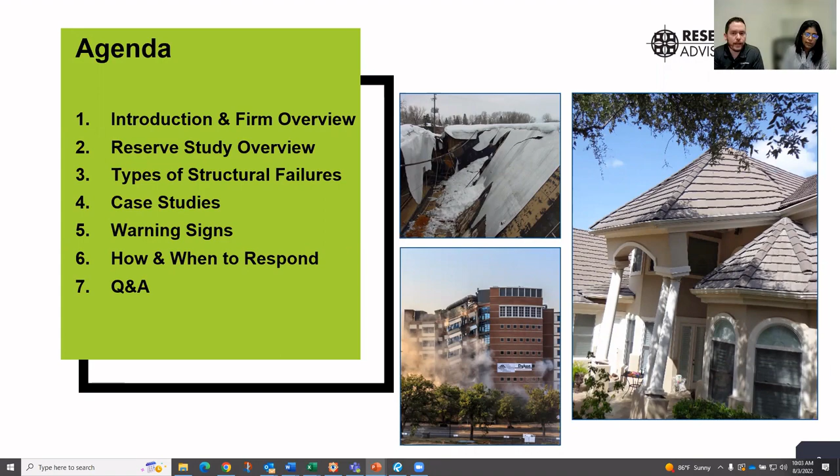So as an introduction to myself, again, Kyle Hunter of Lerch Bates. I started my career in the architecture, engineering, construction industry back in 2013, primarily working in human resources and various functions, but was very interested in the AEC industry, continued working in that industry for quite some time before moving into the building enclosure consulting side of things, working with different consultants.

I've been with Lerch Bates, formerly Pie Consulting and Engineering. Some of you may be familiar with that name. We were acquired back in 2020, about the time that I started on with the company. Operated under the Pie name for about a year before going ahead and adopting the full branding and new logo and everything of our parent company, Lerch Bates.

My role here at Lerch Bates is business development function. So working with our existing clients, maintaining existing client relationships, developing new client relationships, and helping clients to identify issues that they have, and aligning on scope of services for what we do, and budgets, so scope and fee alignment. And then when the time is right, making the appropriate introduction and handoff to one of our technical experts, such as Amita Hamadi, who we've got here today.

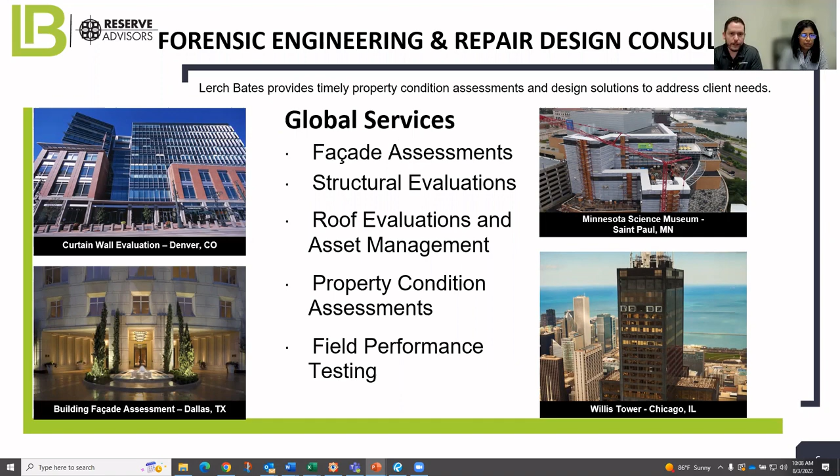And regarding Reserve Advisors, it's actually a lot simpler because we do one thing pretty much, and one thing only, and that's reserve studies. And so similar to Lerch Bates, we have a national presence, which is great because it helps us understand local markets and have engineers located in your backyard, hopefully, or darn close to it. But since we just focus on reserve studies, that's why we thought today bringing in Lerch Bates to talk about bridging that gap, sort of what maybe comes next if you've already gotten a reserve study.

And so with that, on the next slide, I'm going to be a little bit briefer today. I can be long-winded at times, so I'm going to try to save as much time for Amita here. And I'm just going to pseudo-quickly cover reserve studies and just a couple facets about those, which then should lend itself to what Amita will talk about.

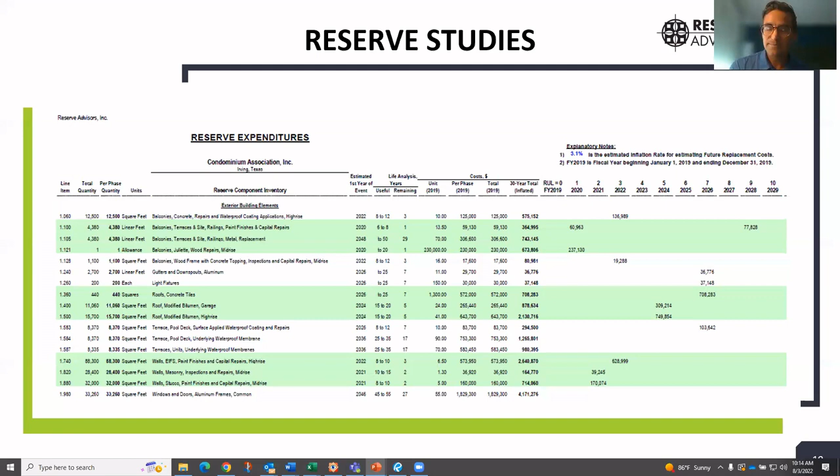And then on the next slide, I just put in some pictures from a reserve study. So this is just an excerpt from the document. And it's a coincidental one because there's going to be some photos later of this same building once these outer layers were taken off. And what I mean by that is this was a visual non-invasive inspection of a property that identified some evidence of possible water infiltration. But again, in that reserve study, we're not peeling anything back. We're making all of our recommendations on what we can visibly see.

So in this case, we certainly said you need to do some near-term work to the wood trim elements. You need to do some work to the facades. But as some pictures later on from the Lerch Bates team will show, once further investigation occurred and was warranted, a whole host of new issues were discovered.

And so that's sort of where I want to bridge that gap: a reserve study, not from us, not from any company, is ever going to be able to identify these hidden underlying defects, latent defects, or just deterioration that is beyond the surface. And that type of deterioration can be wildly damaging, which Amita has a lot more history and experience to speak at length to.

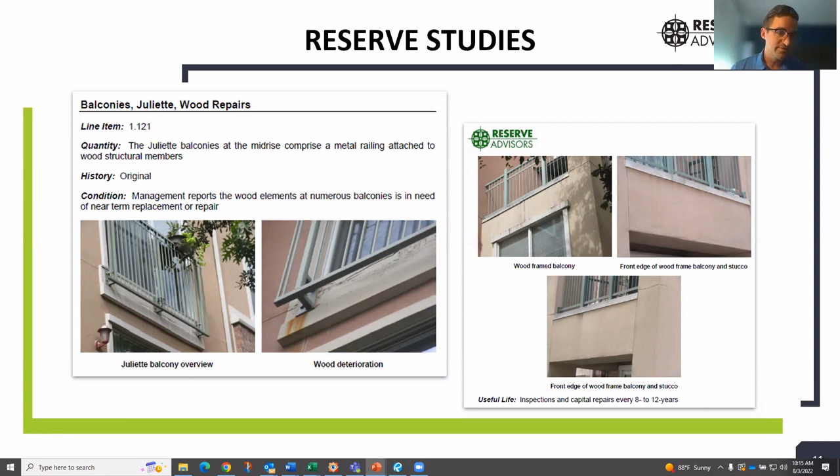And so that's where you want to view this reserve study as that first step, that budgetary step, right? That 30,000 foot view that's sending you in the right direction. But when you have a reserve study, if it's identifying some potentially concerning things, that's where you now need to shift over and look into engineering services, right? And so that's where I'll pass it over. Oh, I think I have one more slide. I'm so sorry. But that's what Amita is going to talk at length about this morning, that next phase of engineering services and what exactly that is, what they're looking for, and things of that nature.

A final point that I just wanted to mention here, we sort of presumed we could get some questions on this. So more and more legislation is getting passed. The most significant one would be in Florida, SB 4D. Very high level in a nutshell, this has required what's called a structural integrity reserve study. It's something we have some resources on. If there are some Q&As, we can try to dabble on it, but we're not going to want to talk for an hour just on that. But that's a pretty big change from a legislation standpoint that's affecting the reserve study and engineering services industry.

And you see some additional legislation in Illinois. Maryland just passed another pretty strong one about reserve studies being required every 5 years. Virginia already had some statutory language, and they've just established a new task force. The reason I want to point this out is we are seeing a rather quick acceleration of legislation around this concept. All of this is revolving around trying to make sure boards and associations are maintaining their properties, because what we're finding is these are huge assets. When damage runs out of control and it's hidden, and then we try to rectify it, the cost can be sometimes insurmountable. And so legislators are trying to put some checks in place, and we do expect to see more and more as time goes on.

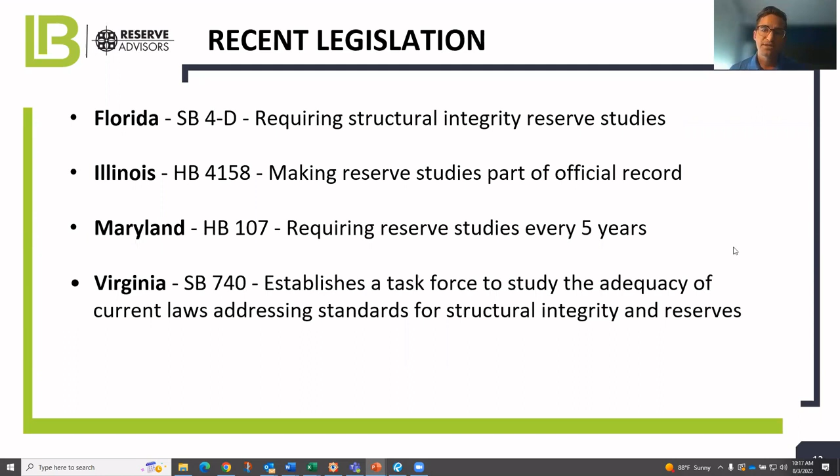So with that, now I'm happy to pass it over to Kyle and Amita, and they're going to talk more about this engineering services side, this much more invasive, in-depth side of services that you may need at some point at your community.

Thank you, Andrew. Well, going back to finding out and exploring our failures in buildings, this is just a slide on how big is this risk, right? This is a 2007 study, it's an old study, but it says, out of 17,000 construction defect claims, 69% are from moisture-related defects. And moisture-related defects just don't stop there, especially if it's a wood construction. The moisture then goes into the structural aspect. And now we just don't have the facade, but also the structural elements that are compromised. So that's where we're talking about opening a Pandora's box, right? What you see on the surface may be just scratching the surface; there could be much more damage that we could see once we start exploring.

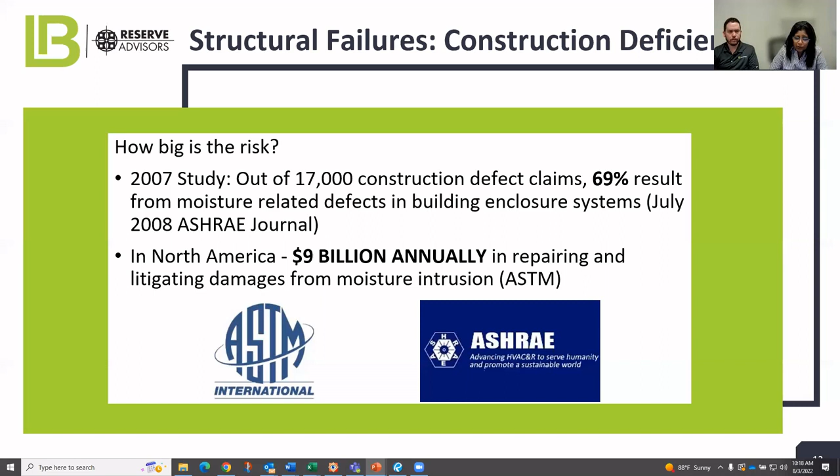In North America itself, we spend about $9 billion annually in just repairs and litigation. And this is only, again, from moisture intrusion. There are a lot of failures that could damage our buildings. It could be design deficiencies. This goes back to our design professionals, the architects, the structural engineers, the civil engineers, where the actual design could have some faults. The second is the construction deficiencies, and this includes where the installation is not done correctly, and mainly it may be the contractors not having the right workforce to construct as per the design documents. Catastrophic events, now that's something that's not in our hands. It could be hurricanes, it could be tornadoes. That's something, like I said, it happens, but we need to go and address it.

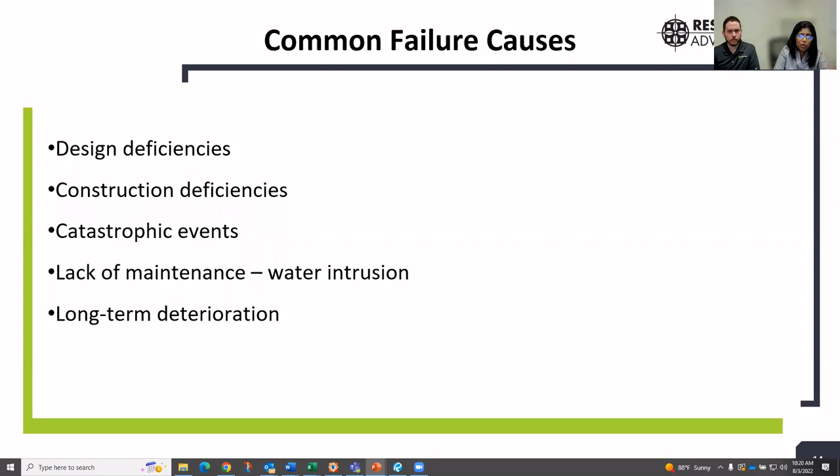Now, lack of maintenance is, I think, something that's in our control. And like we always say, a stitch in time saves nine. Early and often maintenance of your buildings could help you save millions of dollars. And long-term deterioration, again, I always look at buildings like machines, right? We take care of our cars the same way we need to take care of our buildings as well. When it comes to sealants, when it comes to waterproofing elements, etc., it does deteriorate with time because of the UV exposure, with movement, lateral movement, the soil movement. It is inevitable. But again, us being on top of the game and making sure that buildings are safe is all that matters at the end of the day.

Here again is another image. Now, what Andrew does is visual assessments, right? When it comes to engineering services, we actually do destructive test openings, and that helps us come up with a scope on our design documents. And again, when we do our destructive test openings, my team normally targets the worst areas. Areas could be fenestrations, can be penetrations on the building, at balconies, etc., where we historically have seen water infiltration.

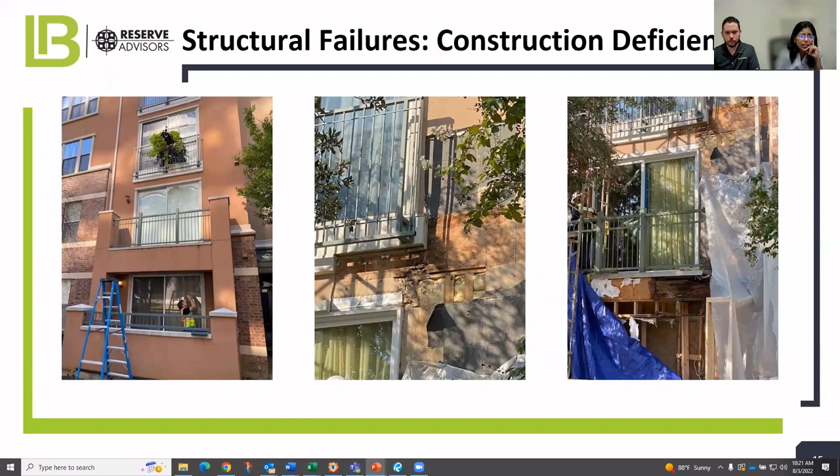So on this slide here, you see we have a Juliet balcony and a balcony, and at the corner right here, you see water infiltration, and we have now removed a little piece of the stucco. And on the third slide, you see the actual structural systems that have been damaged. Now, water is really destructive for wood construction because wood absorbs water pretty quickly, and then it transports the water through a path of least resistance into the structural wooden structures. So that could be detrimental to our wood construction buildings. Now, here I'm going onto concrete and a little bit of steel.

Water—concrete is a porous material, and once the water finds its way into our rebars, our structural systems, it's a battle lost. That's the reason why any kind of signs on your concrete structure, your foundations, that you see failing, that's the time to start taking action.

Again, on the right side, you have metal handrails, guardrails at balconies. On this slide, you see the guardrails were not installed properly, and the weeps at the bottom of the guardrails were blocked. Any structure is designed for it to absorb water and weep out the water through the system. But if the weeps are blocked, you see now the rust, and this becomes important because it's a guardrail at a balcony. If this fails, we could have catastrophic events where we could lose life.

These are the initial signs that I would want everyone to keep your eyes and ears open for when you walk your properties. And most important, keep a log. Make sure, the first month you see something, how far maybe 6 months down the line has it deteriorated? Do you all need to call engineers to have a look at it and take action? These visual signs are the first thing for you all to keep an eye on.

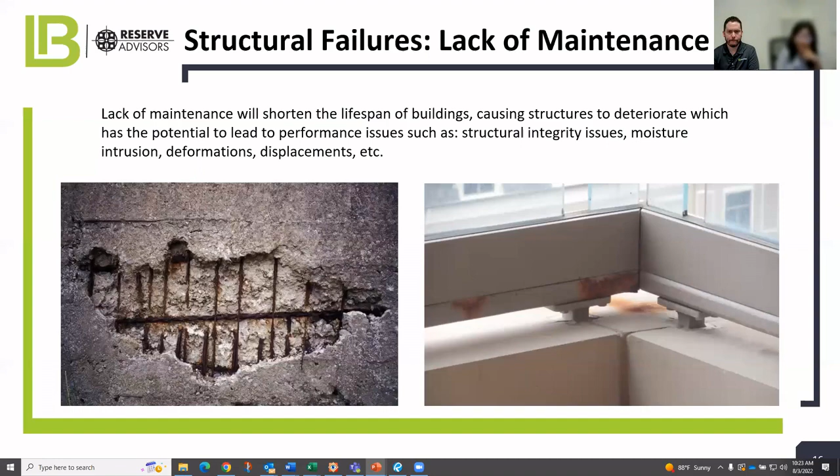Now, this can be, like I mentioned, about long-term deterioration. On the right side, we have a shingle roof. You can walk your roof, see any kind of hail damage, anything that you think has compromised your roofing structure, something to keep in mind.

On the left-hand side, we have a balcony with very few, limited visual signs. You go into it and the entire structure collapses because of the water damage that has compromised the structural systems. Your life expectancy can be shortened because of these adverse conditions, especially when you are on the coastline, because of the continuous high humidity and moisture levels. Not just the wood structures, but also the concrete and the reinforced concrete structures.

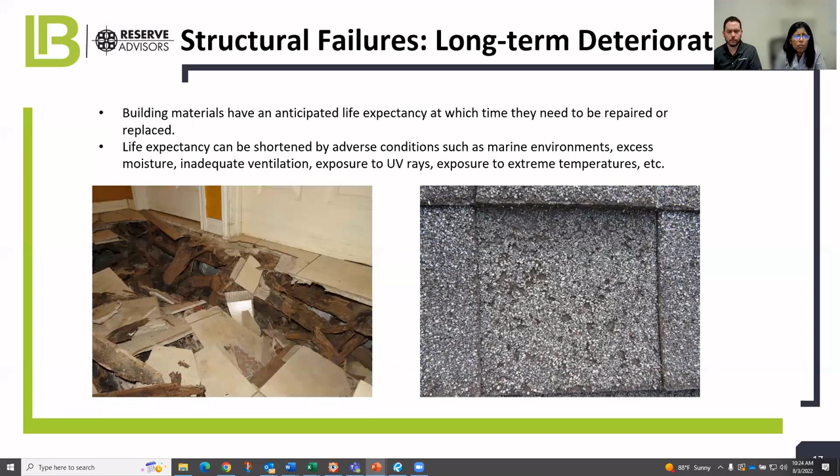I always tell my clients, like Andrew mentioned, it's always the visual signs that are going to be the first red flags on structural systems. Spalled concrete, corrosion to steel. Also, sponginess and bounciness when you walk across a surface, mainly on wood construction. Bulges in retaining walls, or even stucco walls, EIFS walls, and clogged weep holes.

You literally can see these on stone and brick construction. And any penetrations, around the vents of your vent system, if you see water signs, you need to take a good look at it and make sure that you have someone on your team who can take care of it.

Yeah, and I'll jump in here too, Amita. This is a great slide because, as she points out, this is all still visual, right? These are things that one of our engineers doing a reserve study is absolutely looking for. What's important for you as a board member to understand is that a reserve specialist conducting a reserve study isn't doing a comprehensive assessment of every piece of that asset.

For example, spalled concrete: you may have 100 balconies on your building. A reserve specialist isn't doing a balcony survey, going to every single balcony to find any spalled concrete or cracks. Or when we're walking your flat roof, we're not doing thermal imaging, we're not walking every square foot of it. But if we come across evidence of water infiltration at penetrations, or walk over some sponginess in the deck, there's probably water under the membrane, and that's a concern.

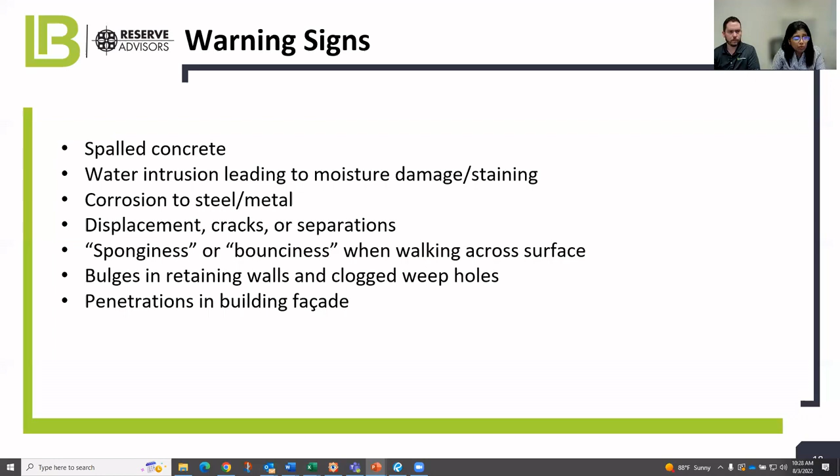here are a few more warning signs, cracks in the brick, and this could be because of the differential settlement in the foundation. Like I said, buildings are always moving. It's a machine, if I can call it, because of the lateral wind loads, the heaving and contracting of the soil, and the dead loads and live loads on a building that cause constant movement in your building. But these are one of the warning signs.

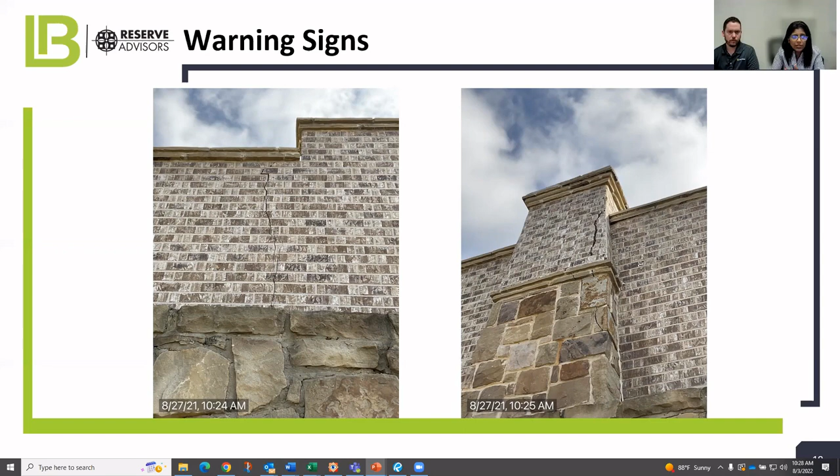You have your facade cracking, and then we can come in and find out why it's happening. And once we know the cause, with our destructive test openings, we can address them and take care of those faults.

Here again is a wood construction. You have failed sealants, or the weather resistive barrier not being installed correctly. And then because of the constant movement, you have the building failing, and now the water has intruded into the building. Just one small intrusion, and the water is going to find its way all the way through the structure in wood construction.

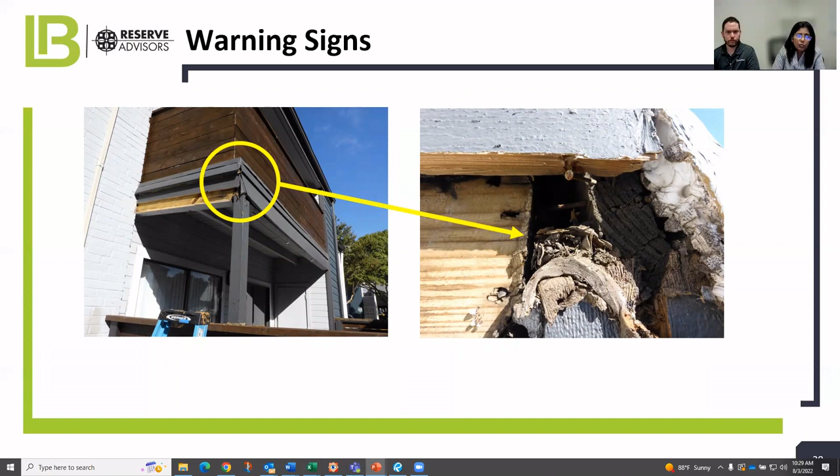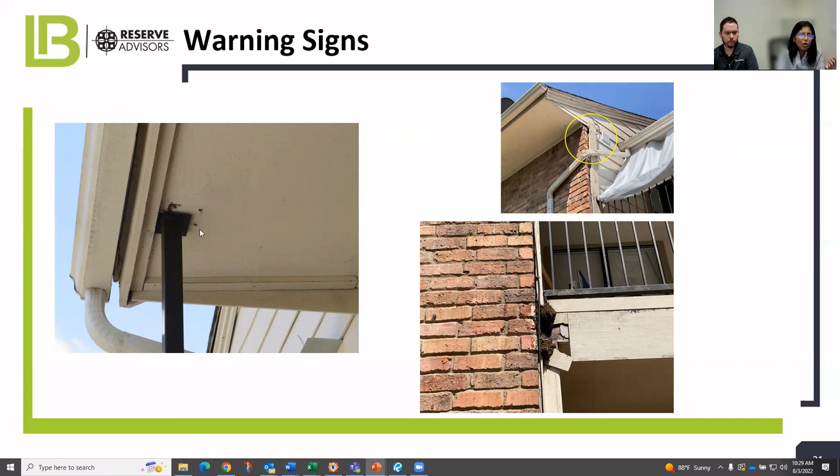And here again, a small failure in the siding has caused the wood to be exposed, and water has now gone all the way. And on the left hand side, the column has, at some point during maintenance by your team, with due respect, these penetrations. Water is going to be entering. It's not being sealed. So all these penetrations are small ways for water to enter into your building.

And this is something where, under the soffit of your balcony, we could hardly see any signs. There were signs of water intrusion. And once we opened it, the entire deck and the joists were deteriorated. And so, your visual signs may be just an opening into a vast area of damage on buildings. So something to look into.

And I'll jump in again here, because personally, I've conducted reserve studies where, to the point you just made, Amita, let me back up to make sure everyone understands. When she said soffit, you wouldn't see this structure here. When you go to this balcony and look up, it would look like a painted ceiling, right? So that's what she means, we wouldn't know what's going on.

And so I've conducted reserve studies where, to Amita's point, you see a little bit, hey, it looks like there may be a little spot of water damage. And sometimes that's all it is, right? It can just be a little bit of water, not a big deal. But then there's been other times where that's what I saw, I returned about 3 years later to do an update to the reserve study, they had investigated, and it looks almost identical to this.

They pulled back layers, they saw the extent of damages, and what they needed to spend was leaps and bounds above anything we would have forecast. Because again, we didn't peel any layers back, so we didn't know definitively how severe it was. So to her point, when you see evidence of water infiltration, even the smallest, it's something to start to take seriously. You don't have to sound the alarm instantly, but you want to look into it to some extent.

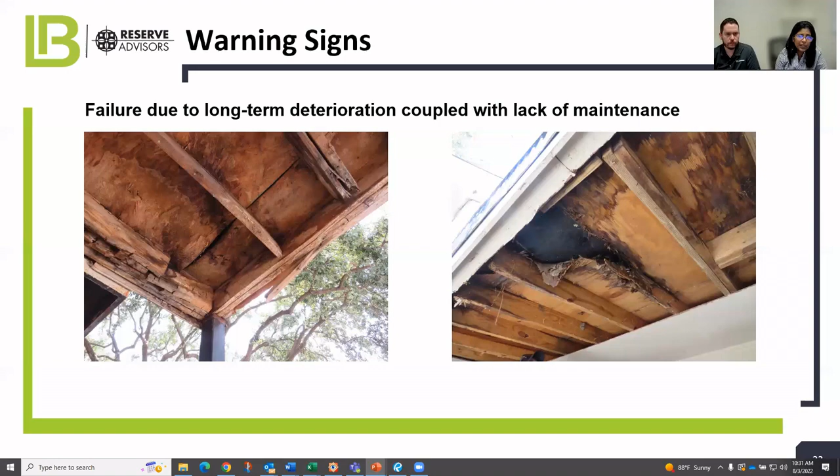Absolutely. And the earlier we start taking care of our buildings, the better it is. Again, this was the same balcony, and you can see the Simpson ties. Now it's a structural failure here, where the joists have peeled away from the beams, and that's where we say, at the earliest, even with the smallest visual sign that you have, have a look at it. We'll save a lot of money in the end.

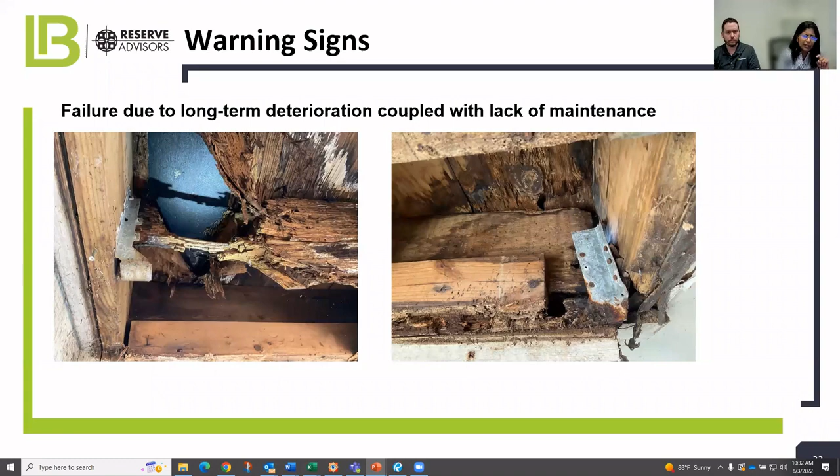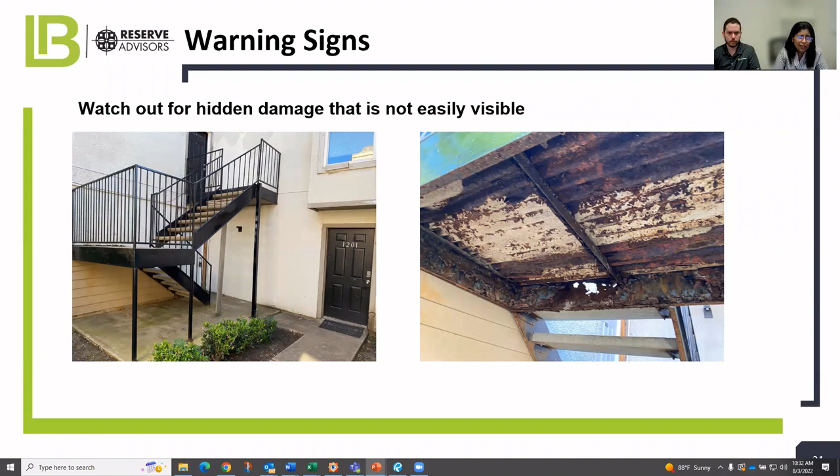And warning signs are always there on buildings. Water is the sign, water marks, etc. Right? Don't let it go and put it off for another year or two. The urgency is right now.

And also, we could always take care of our buildings with what I call Band-Aid fixes, right? Where you just put sealants and get done with it. Do not put this lipstick on your structures. Let's investigate a little more and take care of it the way it needs to be done properly. And do not ignore small problems, because they will eventually grow into bigger problems.

Yeah, and Amita, I think you said it really nicely just a minute ago and I'm going to rephrase it, but the cost to investigate something early, when you look at the risk of letting it run and run and run, is such a drop in the bucket. You just investigate and either find out it's not a big deal and move on, as opposed to ignoring it for years and years and having a tens or hundreds of thousands or $1 million problem.

And then additionally, we can think of a specific example, maybe a roofing system. This could be at a townhome type property, 20, 30 buildings, sloped asphalt shingle roofs, with regular inspection of those. While that's going to cost an association something, the regular inspection by a professional, fixing these small things, to your point, and fixing them, not band-aiding them, should really help these associations achieve a longer life. Would you agree with that?

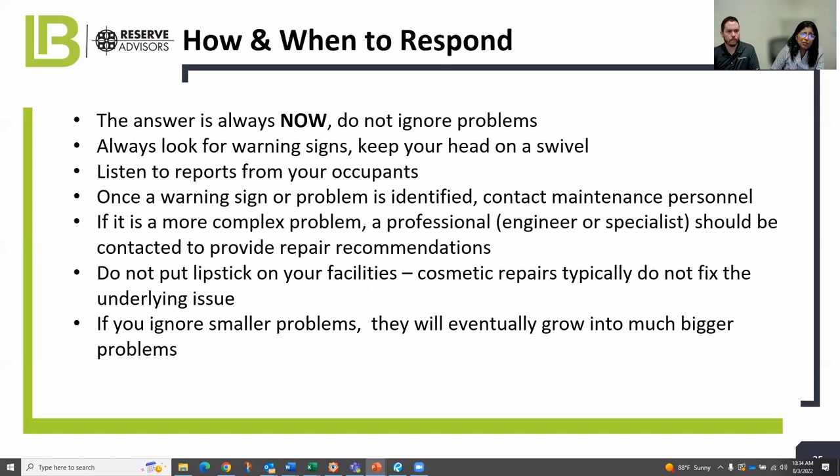And maintain the property, grading, your landscape, your irrigation. If you have elevated planters, we don't need to be irrigating those plants year round. Have moisture sensors. Only when the plants need water, let the irrigation system start. That'll help you with your roof systems if they are elevated.

Building enclosure: let's do it right now. Let's take care of it when you identify it, when it's small, when it's urgent, rather than waiting for years and pushing it down the hill. And also when you have any kind of leaks, let's document it, because the historic information helps our teams investigate why and how the water intrusion is occurring. And we always have immediate repairs and short-term repairs, and let us help you identify those and help you maintain your buildings.

Yeah, and if I can also add, that concept of good historical documentation is going to be very, very helpful for both Amita and her team and us and someone conducting a reserve study. Because the reserve study and engineering services have a lot of similarities, but also huge differences. And if we go back to what I started with, in the reserve study we're trying to give you financial guidance to plan for the future and not have special assessments and not get surprised.

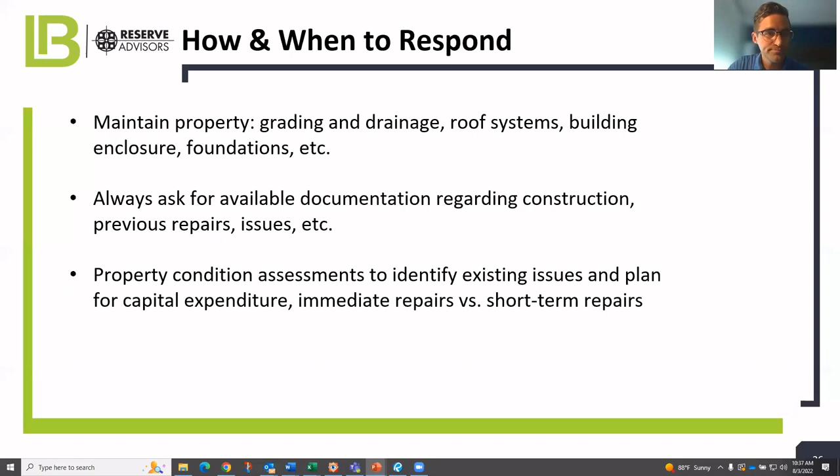Absolutely. And also, Lerch Bates takes care of construction defects, especially in Texas. We have something called the statute of limitations. If you are within the statute of limitations and you want to go and take care of it with the builder, we are always there to help you on the litigation side as well.